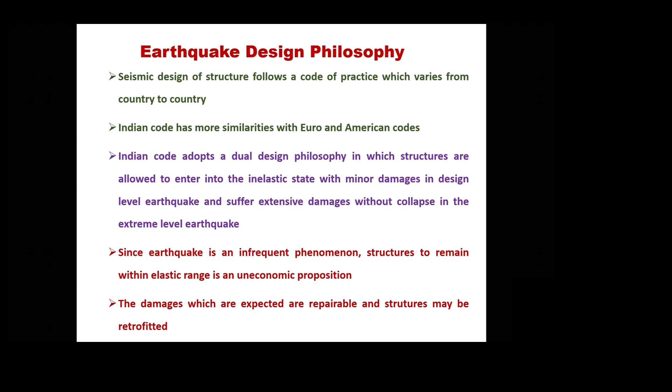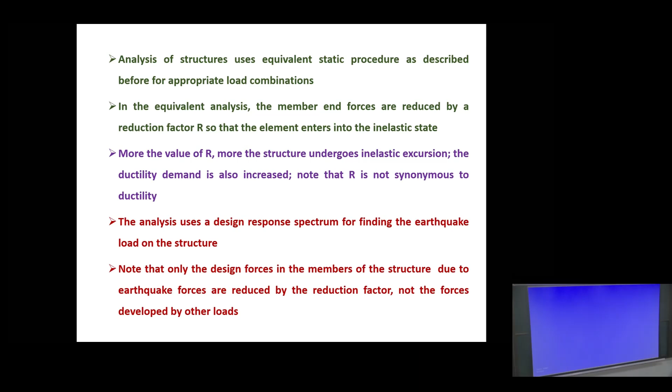All of you have come across the design force for earthquake resistant design, which has a reduction factor R, importance factor I, and some spectral acceleration. Using that, you find out an equivalent lateral load, an equivalent static lateral load. Although earthquake is a dynamic effect, you intelligently convert it into an equivalent static load, and with the help of that you design the structure.

Here also two very important questions come up, which people can ask you. These are questions which are not exactly common sense, but require some understanding, though not very difficult. There is no mathematics involved in what people are asking.

For example, why should you allow damage? You can answer: because you don't want to make it an uneconomic design. This is simple, done.

Similarly, if someone says earthquake is a dynamic effect, how are you considering in the code an equivalent static load to design? Why static load? This is a common sense question - tell me.

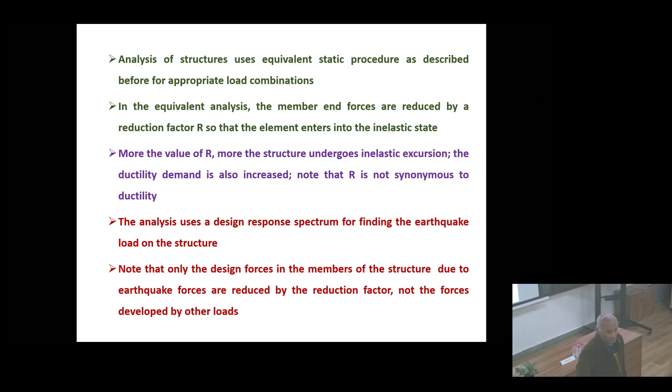Common sense question: is dead load a dynamic load? Is live load a dynamic load? No, they are all static loads. And when you design, do you design only for dead load, only for live load, or only for earthquake load? No, all three together - you add them together. If you are adding them together to find the member forces, then all three should be static. Otherwise, how can you do that? So in some way you have to make it static.

One way to make it static is to take the maximum value due to earthquake and add it. But which maximum value will you take? We do not know, because earthquake itself is an uncertain phenomenon. So therefore the codes basically come out with a certain equivalent static load for which you should design the structure for earthquake.

And that's all about the earthquake code. First, it tells you how to obtain the equivalent static load. That is the reason why you have an equivalent static load for earthquake. Is the answer clear? This is an answer that anyone might ask, and you should be able to tell them.

The moment you are doing this, you will find this R factor coming in, and the I factor coming in - importance factor and reduction factor. This has also been taught in your seismic design, earthquake design courses. I factor is importance factor and R factor is reduction factor. And there is something called Sa, spectral acceleration, with the help of which you multiply. And weight is there, W.

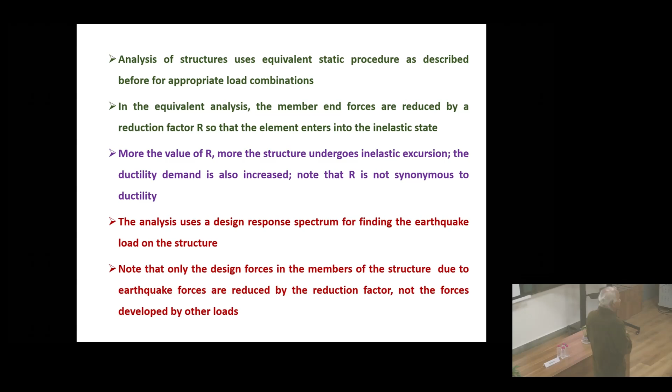What damage has to be there? So you can see that whenever we are talking of any seismic design, whether it is performance-based design or ordinary seismic design, damage is an essential part of it.

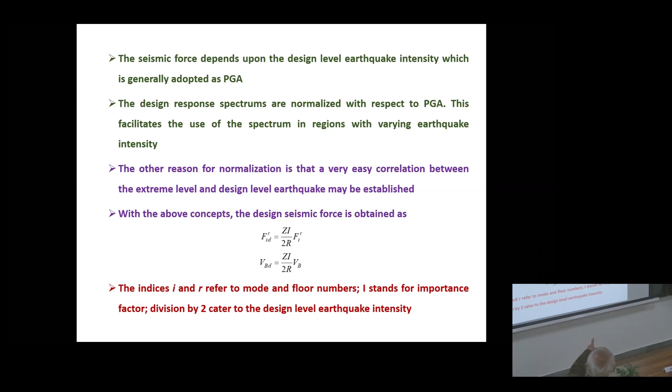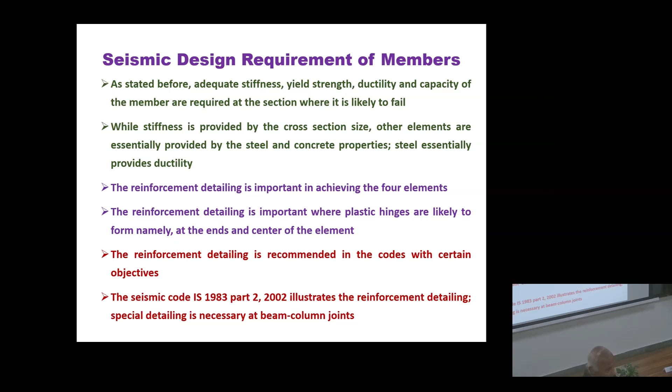So this is also a seismic design requirement, that the detailing, reinforcement detailing should be proper, and there are some other code provisions which all of you have done in earthquake resistant design of structures.

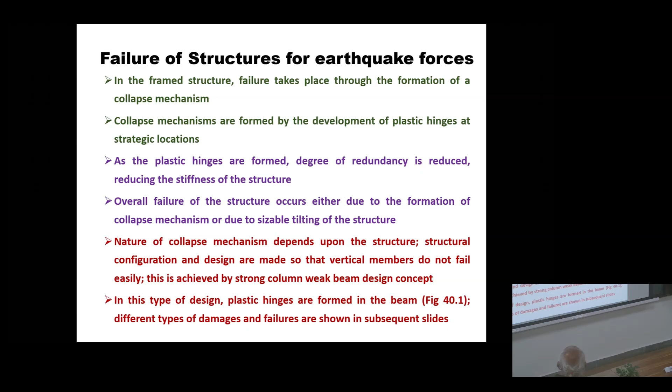Now let's come to the failure, which is the important thing: damages and failure. Whenever damage takes place, it takes place in a particular way. All structures are not damaged, or all elements are not damaged, in the same fashion. For example, some structures may have a shear failure, some structures may have flexural failure. So mostly these are the two types of failure, shear failure and flexural failure. They take place in the individual members, and accordingly we see that kind of crack patterns.

And there are, of course, spalling. Because of the spalling, the reinforcement gets exposed. So these are the few things about your seismic damages.

Now, unless we have full damage getting into the structure, the structure does not fail. A structure or a joint must be converted into a mechanism, and unless that mechanism takes place or happens, neither that joint nor that structure will fail. And why? All of you know mechanism means one more degree of freedom over and above statically determinate. It's a mouthful, as I told you previously also - the difference between mechanism and a statically determinate structure and an indeterminate structure.

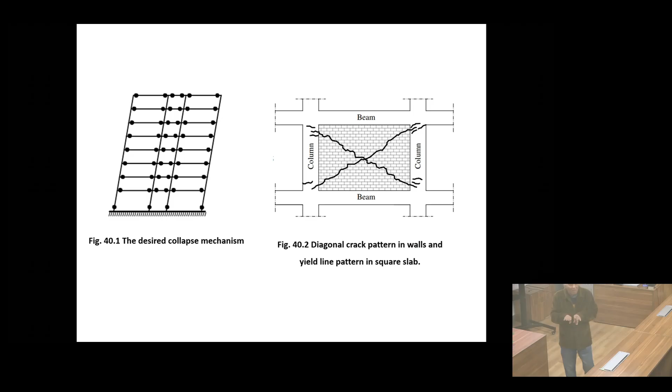Statically determinate structure has no redundancy. Statically indeterminate structure has at least one redundancy. Mechanism is one more degree of freedom than statically determinate. So that makes a mechanism, and then only it fails.

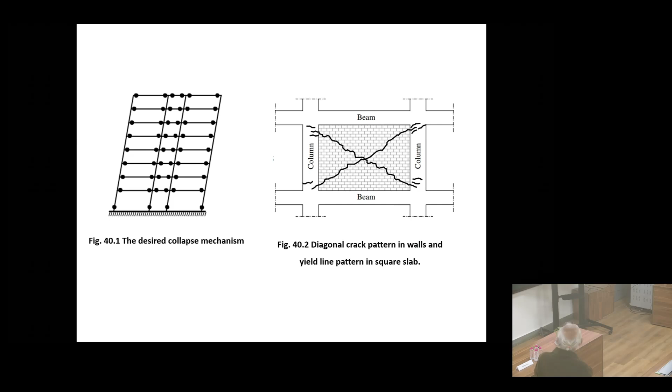So the damage will be such that either a complete mechanism will take place or a partial mechanism will take place, and then only the structure fails. So mechanism is the most important thing. What are the different types of mechanism that can take place? Let's see: say this is the building, and I was telling you that the building will fail when there will be complete collapse. So for complete collapse, the hinges at the ends of the beam should take place, and all the hinges will take place, including at the bottom.

Then the structure has been converted into a mechanism. If you take out one hinge out of it, then it will be statically determinate. So then, like a mechanism, it falls down. This is the ideal mechanism.

But let's take an example of a partial mechanism of failure, which usually takes place. Say, in place of these hinges forming in the beam, somehow or other the plastic hinge forms here, here, here, here, here - all along these. Then what will happen?

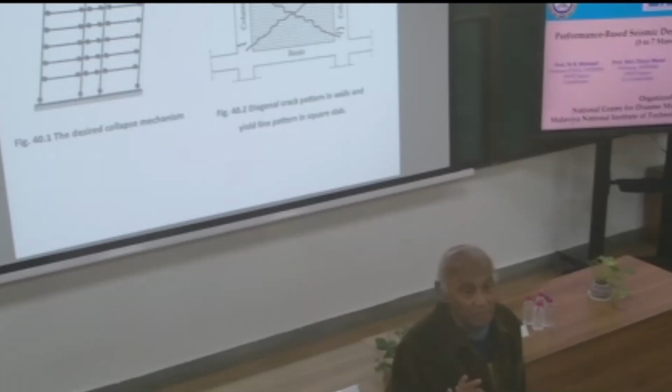Yes, okay. Now, if you look at this building, the number of hinges which are formed are far less than the number of hinges required to convert into a collapse mechanism. So it should not fall down as a mechanism. But this is a partial collapse.

Why? Because this portion has swayed like this, and all these other portions here remain intact. Now tell me, can this structure fail? Yes or no? How? There will be additional moment.

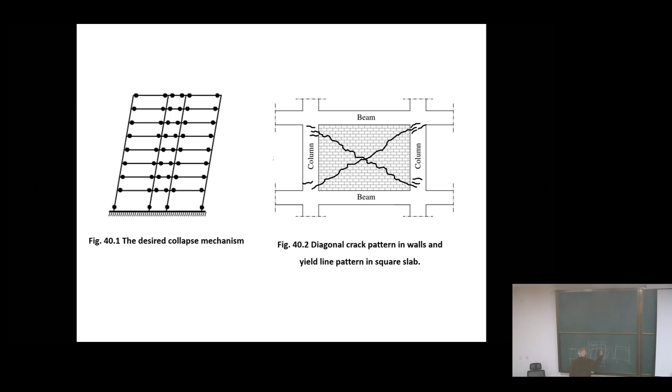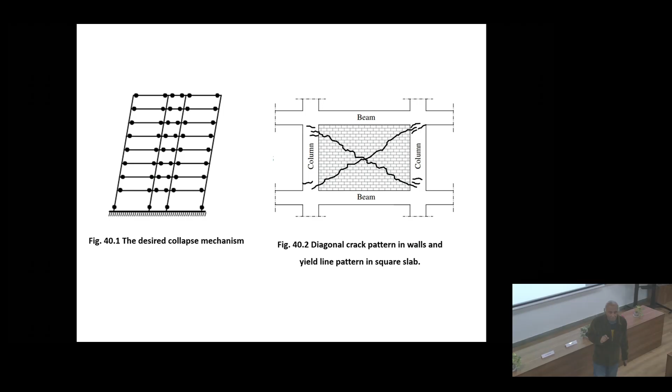Yes. So the additional moment is - the original structure placement was like this, and this top portion has shifted like this. So the weight which was previously acting over here, now the weight is acting over here. So there is an additional, huge moment coming at the base, and the moment there is huge moment coming at the base, you will find that all other points also give away. So although it's a partial mechanism that has formed, it leads to the failure of the structure.

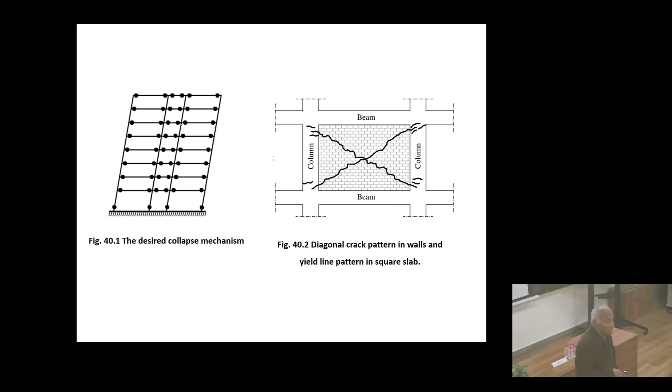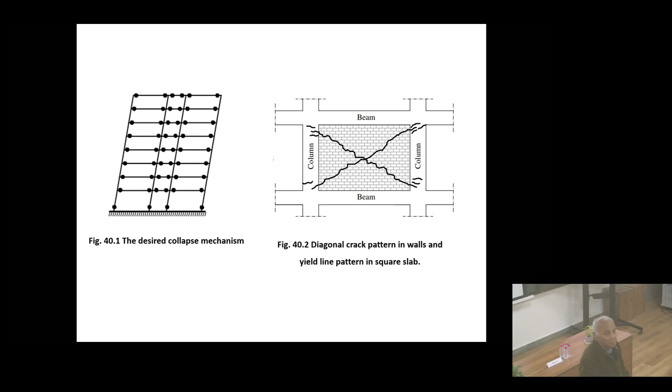So sometimes we find that not at all places are hinges formed - there are places where still hinges are not formed, so the structure has not converted into a so-called mechanism, but yet we will find the structure has failed. So we call this the failure due to partial mechanism, formation of a partial mechanism. The reason is that because of that partial mechanism, the structure has displaced in a way that adversely affects the structure and brings unbalanced force into the structure, leading to failure.

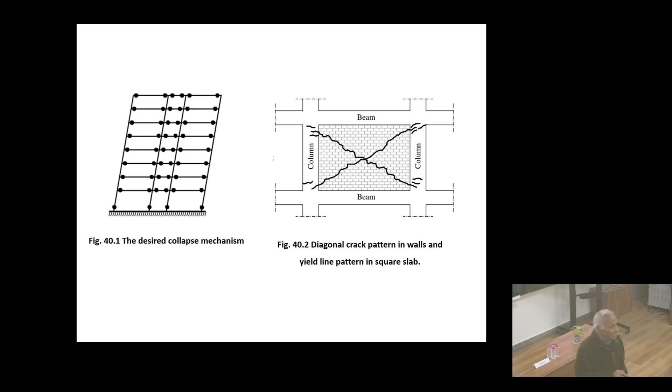Alright, and sometimes this is exhibited in the calculations also - that means in the calculation, there is a way of calculating that when it fails due to this particular collapse, this collapse load factor turns out to be very less for a system which is having a partial collapse mechanism.

The calculation shows that even if you are solving the problem using a computer, you will find that after formation of certain hinges, certain system, the computer stops. It cannot calculate. This shows that at that time some kind of adverse displacement has taken place, and because of that the further calculation is not possible.

So the important message is that it's not necessary that a complete mechanism has to occur for failure. Failure can take place in a partial mechanism, formation of a partial mechanism, and that is a rather frequent phenomenon.

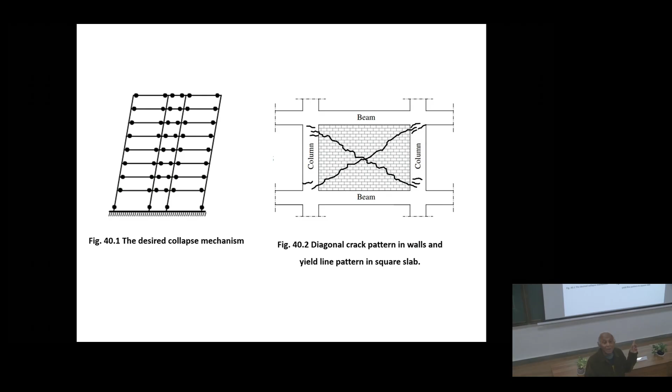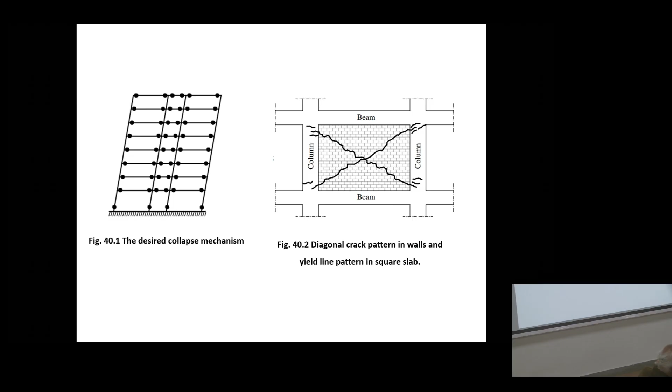Because of that kind of mechanism, this kind of structure fails. Similarly, if you look at a wall like this, when the complete diagonal cracks are formed, you will find that four triangular segments separate out, and a failure takes place. So this is again a mechanism, it has given rise to a mechanism. In all cases you will find there is a failure because of the formation of a mechanism.

And this is a shear crack. All of you know, diagonal cracks are shear cracks. Then these are the flexural cracks, and these flexural cracks finally get converted to a plastic hinge here. Similarly here, these cracks finally convert to a plastic hinge over here. So these will all be converted to plastic hinges.

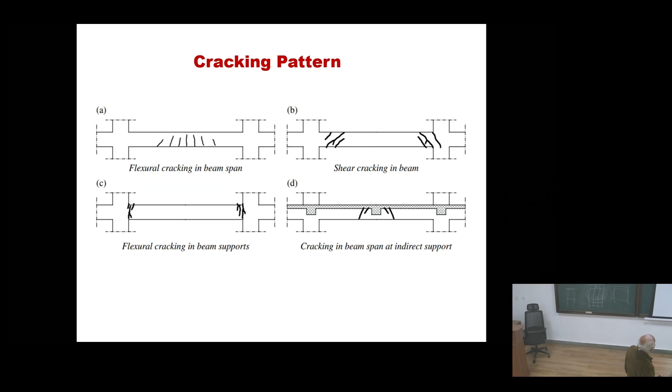So these are different kinds of damages. Again, this is a failure pattern in the column failing, and you can see that in a short column you can have this kind of scenario. This is a shear crack, this is a flexural crack, this is a flexure-cum-shear crack. The important thing is all of them give rise to one or some kind of mechanism.

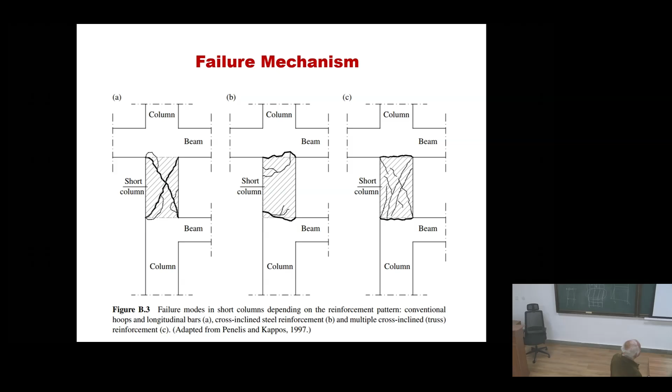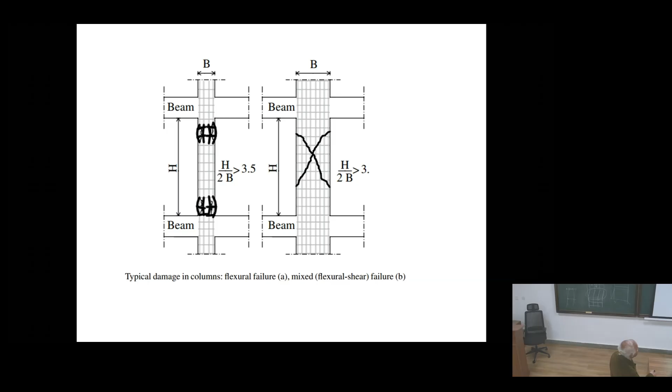You can see clearly here the plastic hinge kind of thing is forming. Here the shear crack is forming. So these are some of the pictures. You can see that complete spalling has taken place, and the steel has yielded over here. So this is actually idealized as a plastic hinge. This is what we mean by a plastic hinge.

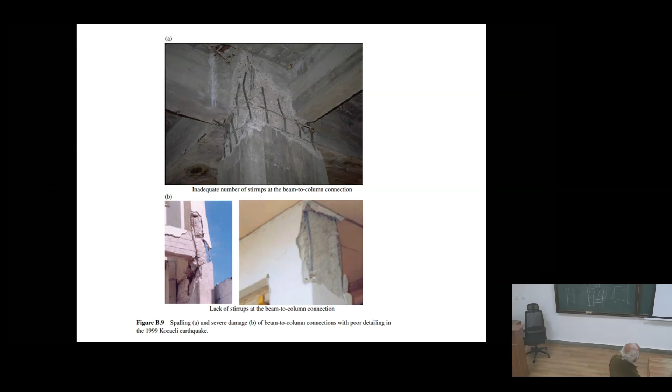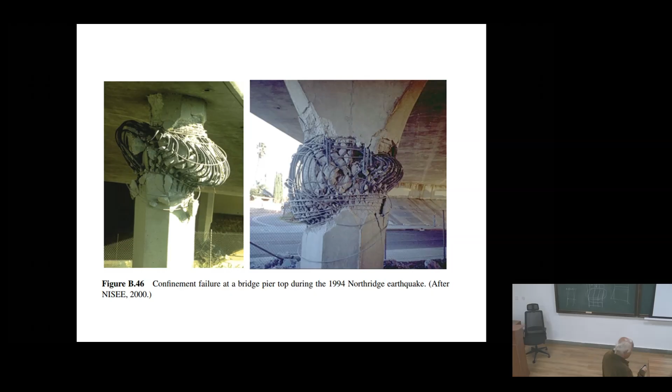This is spalling, this is spalling. This is the actual plastic hinge, this is the picture. What we show as a plastic hinge in our computations, all the reinforcement has yielded over here. Here at the bottom we have bottom plastic hinges, which you put in the columns. You can see this is actually the scenario.

So I have talked about the seismic damages and ductility. Now you have an idea about the damage that takes place. Now while we are talking about this damage, we put a limit to the damage. How much the rotation should take place? What will be the extent of damage? So whenever we put some limit to this.

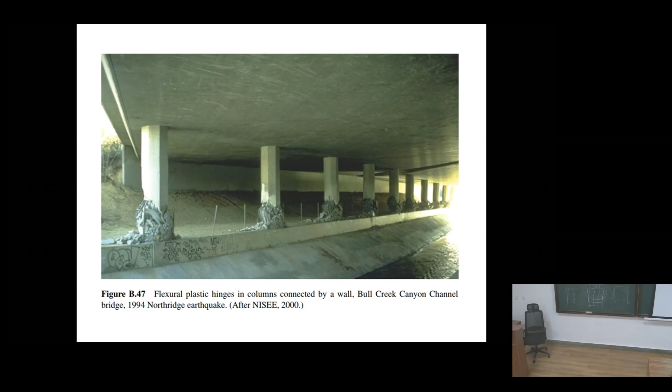That is what is in the performance-based design. In the performance-based design, what we say is that we allow damage, but not beyond a limit. So we limit this. In seismic performance-based design, damage is a must, but to limit the damage within a certain level, that is what we want.

And when we do a performance-based design, we say there should be plastic hinges in the frame. But the number of plastic hinges should be restricted to, say if it is a 40-story building, restricted to 20. So what does it mean? It means that if you have got 20 plastic hinges placed in the structure, then the interstory drift would be limited.

If you have 60, interstory drift will be more. If you have 40, interstory drift will be less. So we are trying to have a limit on the interstory drift. Or you can say that if you have got 40 plastic hinges, you will have more or less displacement than if you have 60.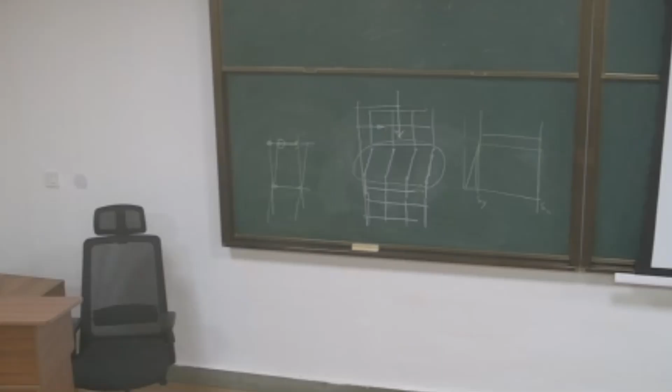So therefore, the whole idea of performance-based design is to give a criteria that you design the structure, but the maximum displacement should be this, maximum drift should be this, or maximum plastic hinges should be this, or the rotation in the plastic hinges should be this. These are the criteria. Based on that, you design your structure. Is it clear? So that's the importance of the design or the damage.

So you have talked of ductility, you have talked of damage. The last word about damage is that when we go to seismic review, we will see the damage in the building frames, especially when we talk of building frames. Damages are described as a permissible rotation in the plastic hinges. Why? The more rotation you allow, the more the structure will deflect. So one way of restricting or limiting the displacement, and if you limit the displacement, the interstory drift also will be limited. So one best criteria for limiting the maximum story drift, maximum displacement, is to limit the rotation at the plastic hinges.

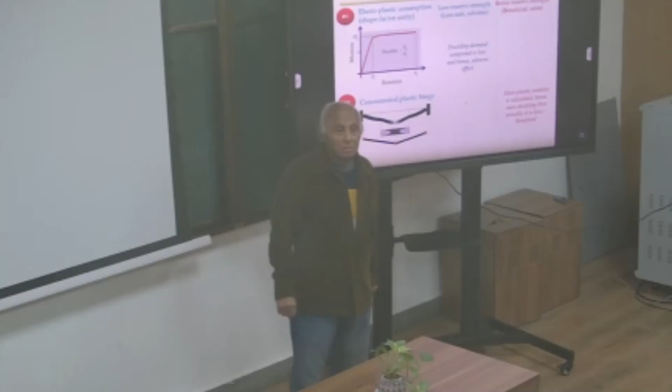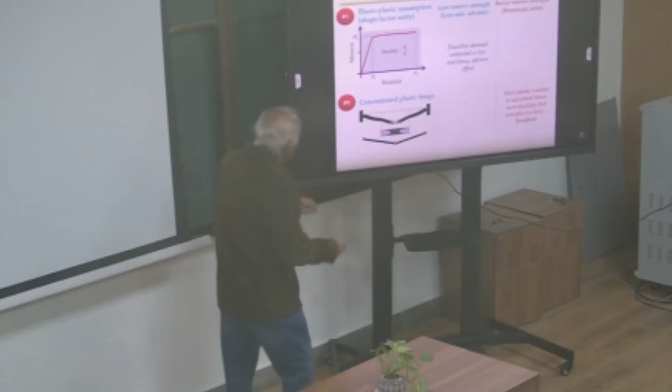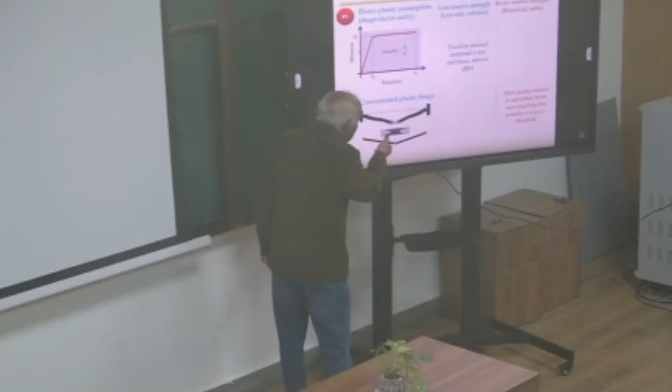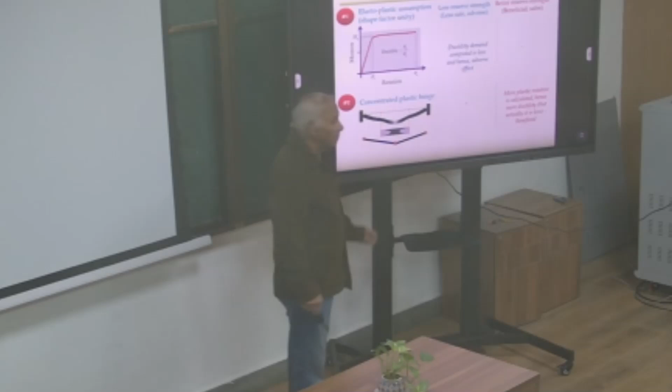Okay, but if you look at the section here to here, this is the area, this is how the plastification has taken place. At the center, complete zone is plastified, that means all the fibers from the top to bottom have reached the yield. Adjacent section also has yielded. Then from here onwards, you can see only a part is plastified on the top and bottom, and this goes like this until this portion. But here also something is there, at this portion, then rest of the section is elastic. So we call this a distributed plasticity for the entire range.

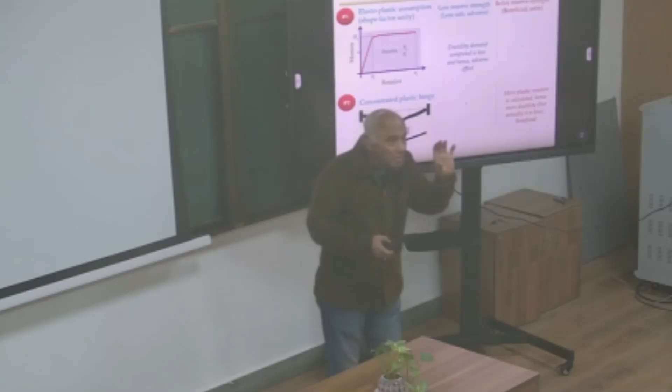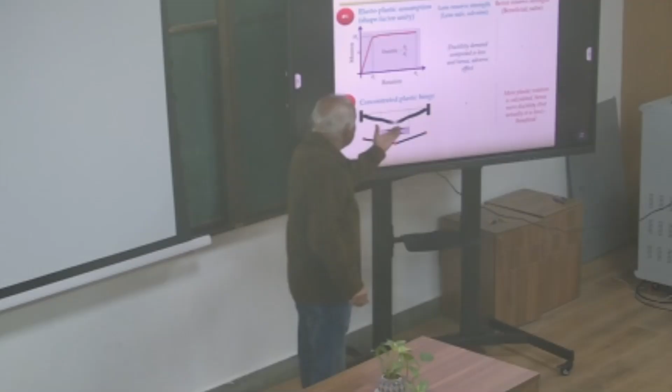In the center portion, full plastification gradually reduces, and then after that it becomes elastic. So over this entire portion, the deformation takes place. At the center full plastic, and adjacent section partly plastic, partly elastic. But overall deformation in this region is very high compared to the elastic portions. So this is the actual scenario, and you can see that at the center there is a lot of deformation.

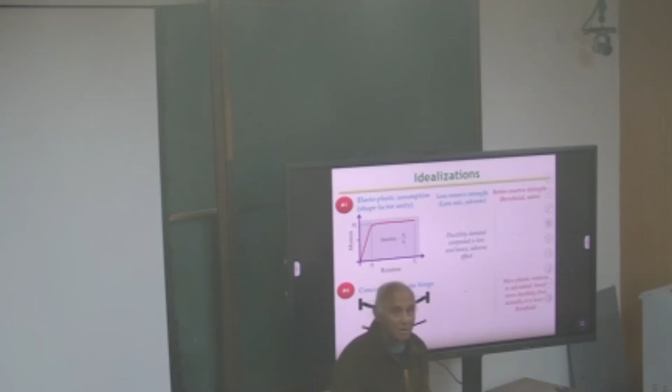Now, if I want to do an actual analysis, I should solve this problem using finite element. That means in this region, I shall divide into finite elements, and using our finite element solution, find out the stresses at every point and get the actual picture. This lumping business will not go. But if I want to do that for a frame, the time required to analyze will be tremendous. So therefore what we do, we make an approximation.

This approximation is called the lumped plasticity approximation. That means we say that all the plastic deformations that have taken place, I am lumping at a particular point. Here I am lumping at a particular point, here I am lumping at a particular point. And in between, the deformations are considered to be extremely small compared to the rotation taking place at the plastic hinges. In other words, we use it to be a link. So we have a link now. Link means it becomes a mechanism. Three hinges, two members, mechanism formation is there, and the structure fails under this mechanism. So that is what is known as the plastification.

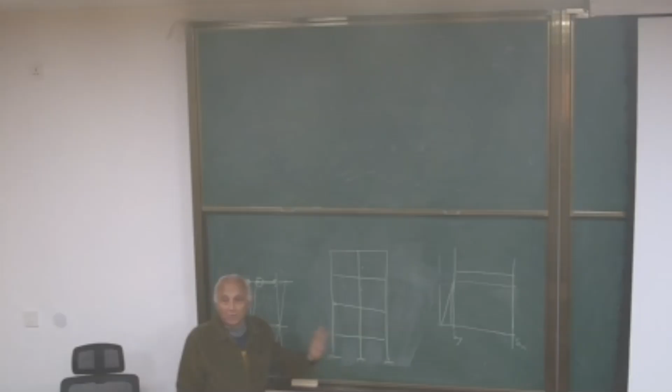Say it starts like this: one plastic hinge forms over here at some state. In other places, plastic hinge has not formed. Then the structure will displace this much. At this displacement, I have a plastic hinge like this.

Will the structure fail? No. It requires some more plastic hinges, at least so that the deflection becomes more. So say there is a plastic hinge here, and there is a plastic hinge here. So in this state, what will happen?

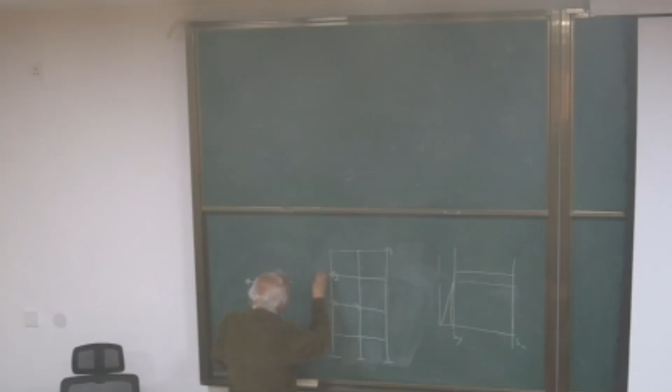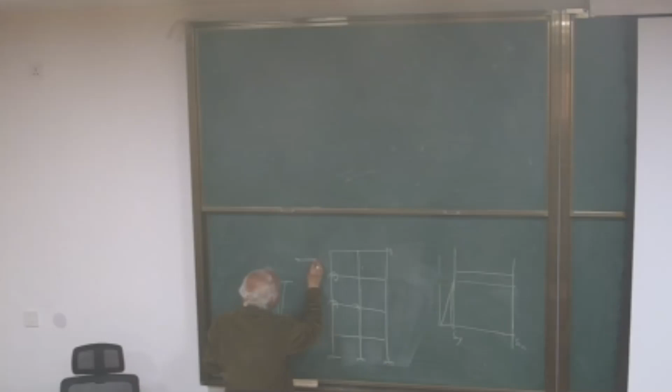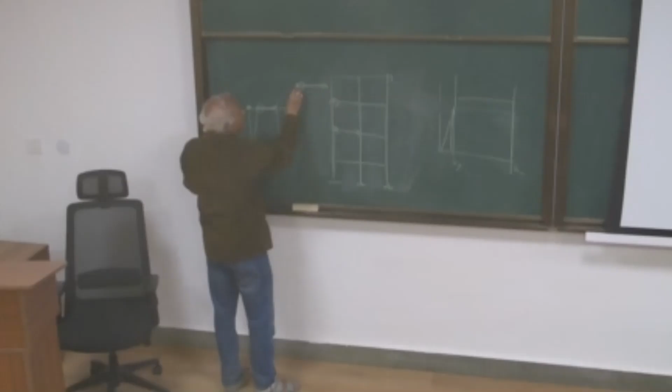For further deflection, there will be rotations that take place here, here, and here. Because the moment it bends, it goes like this, and becomes this. The moment it displaces, the rotations take place from this state to this, the moment it rotates, it moves like this.

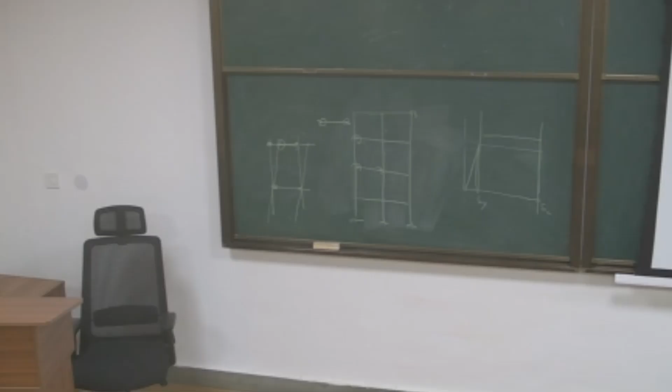So this rotation in the plastic hinge governs: the more the rotations, the more displacement at the top. And whenever there is more displacement, the story drifts also increase. So you can see that what controls the top displacement and story drift is this rotation of the plastic hinges, unless the number of plastic hinges is such that it causes collapse.

So prior to that, the rotation in the plastic hinge is a big criteria, right? And performance-based seismic design is centered around that.

What you say is that you design your structure in such a way that the maximum rotation in the plastic hinges remains within 0.001 radian. Or you specify that your plastic rotation should remain in the range of 0.005. So that's how you can specify it.